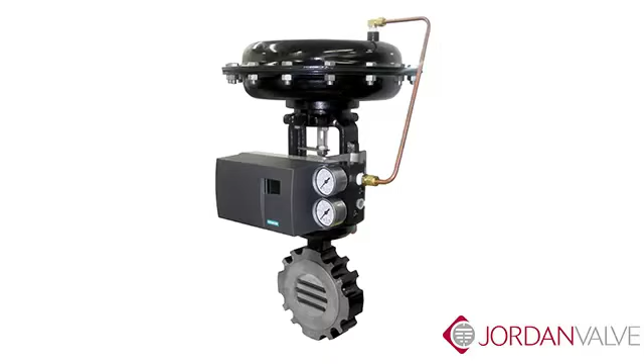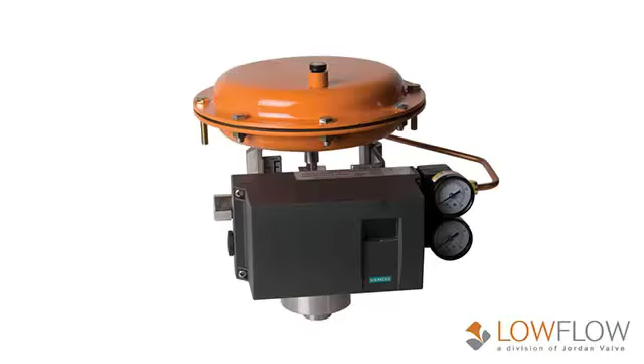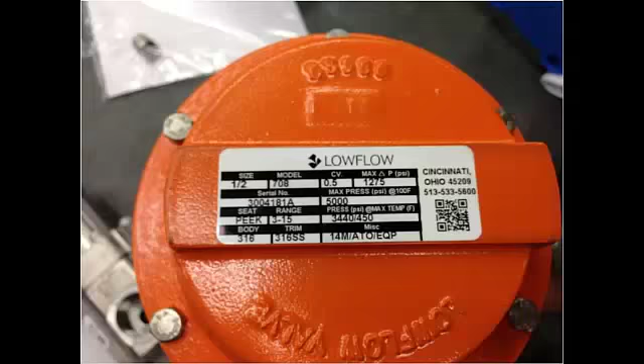Many Jordan, Steraflow, and Low-Flow products are supplied with the Mark 16 IQ side-mounted positioner. This troubleshooting guide is provided to help you quickly diagnose and fix problems encountered in the field. In order to determine what is wrong with your valve, you must first gather information about the product. Find and record the serial number and application parameters.

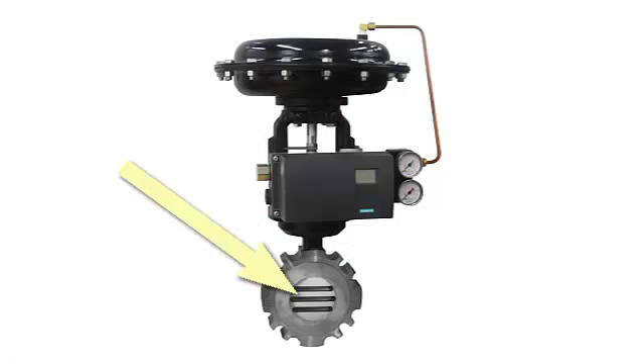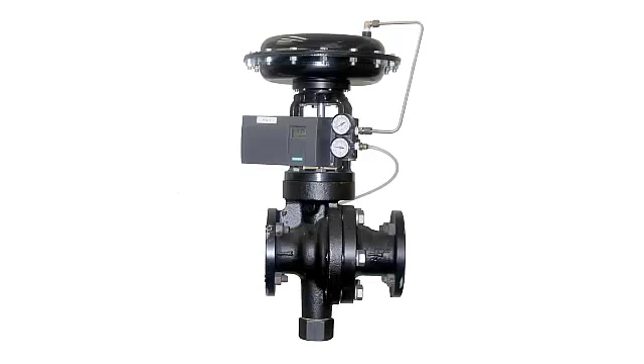There might be no problem at all, just something that the customer is unfamiliar with. For example, on all Jordan Valve sliding gate control valves, we zero the overlap of the seat out when we calibrate the positioner. Because of this, the signal reading will not match the position reading. Sometimes the customer interprets this as the positioner being set up improperly, but in this case, everything is set up correctly. Note that this won't be a concern on Globe-style Jordan Low-Flow and Steraflow valves, as they do not have this overlap.

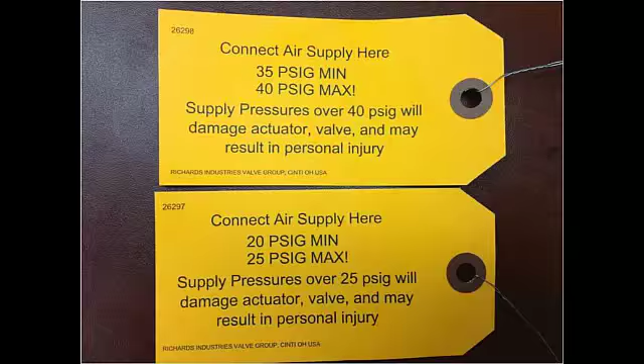Another common scenario is over-pressurization of an actuator. Jordan, Low-Flow, and Steraflow actuators are limited to 20 to 40 psi. Make sure your air supply does not exceed these minimum or maximum requirements. If the supply pressure is too low, the actuator may not have enough pressure to fully open or close the valve. If the actuator has been exposed to a pressure greater than recommended, it is likely that some internal components will be damaged and may need to be replaced. Note that it is strongly recommended to allow the factory to do this kind of repair.

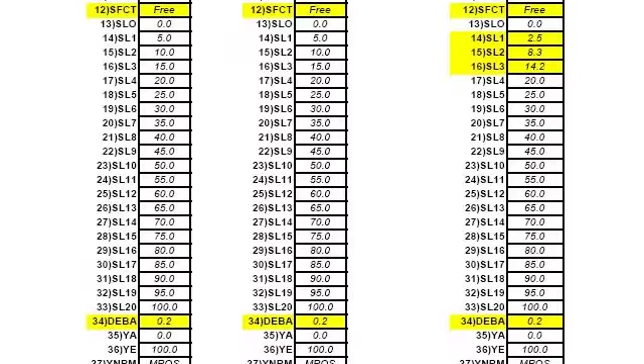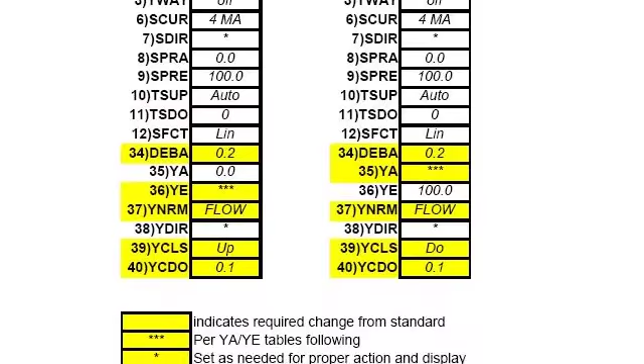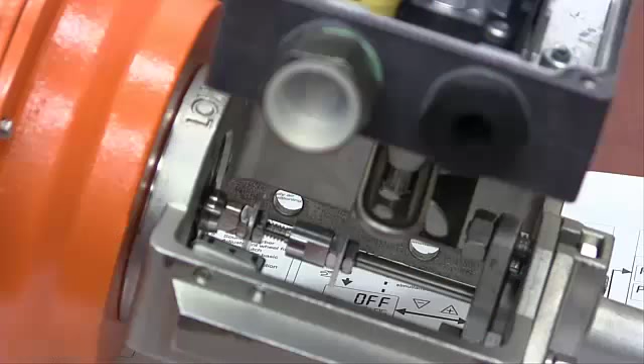All of the control valves that we install on the Mark 16 IQ positioner are factory calibrated before shipment. Included in the shipment is the positioner setup guide, which shows the factory settings for each valve. The guide is also available on our website. No matter what has been changed, it is possible to get the positioner back to where it needs to be. First, make sure that all the components in the valve are in working order. The mechanical connections should all be tight and not easily movable. All assembly parts should be firmly attached to the valve stem.

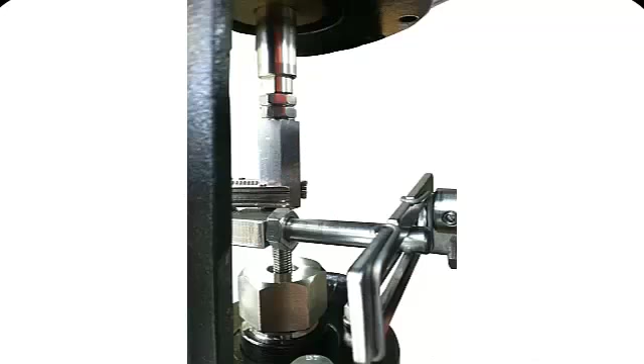Next, check that the linkage is connected and tight. The spring-loaded nylon bushing on Jordan and Low-Flow positioner arm pins should be engaged with the mating arm. The bushing is spring-loaded and should be firmly holding the cone in the bar. The Steraflow valve control linkage is a little different. There is no nylon bushing pin on the arm. The pin is held in place with a spring steel mechanism attached to the bar.

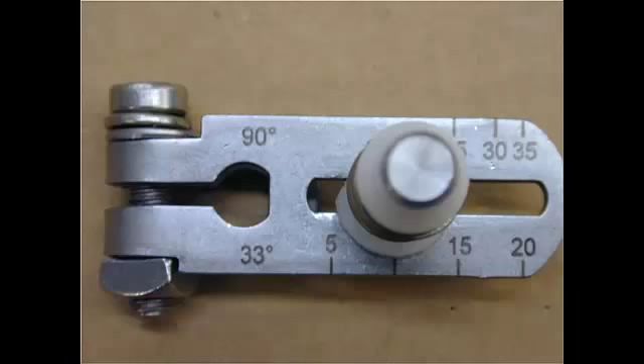Regardless of the valve and linkage, the pin must be properly set on the positioner arm. Make sure that it cannot be slid back and forth. On Jordan and Low-Flow valves, if it is loose, you can tighten the back nut with a 10 mm open-end wrench. If using a 4 to 20 milliamp signal, use the two-wire connection method, also known as loop-powered. Make sure the positive lead is connected to terminal 3 and that the negative lead is connected to terminal 8.

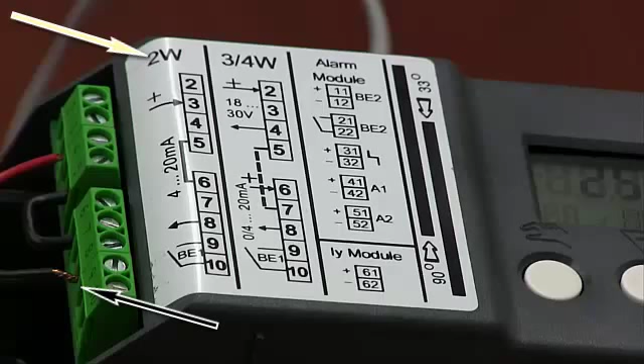If you are using a 0 to 20 milliamp signal, you must use the 4-wire method. First, ensure that the jumper wire that is connected between terminal 5 and 6 is removed. The positive signal lead should connect to terminal 6, while the negative lead is connected to terminal 8. The auxiliary DC voltage source should be connected with the positive lead to terminal 2, and the negative lead should be connected to terminal 4.

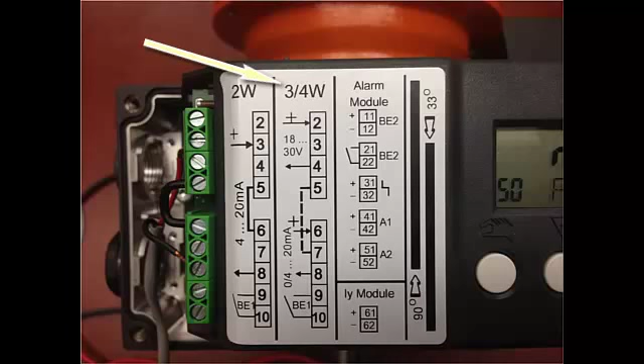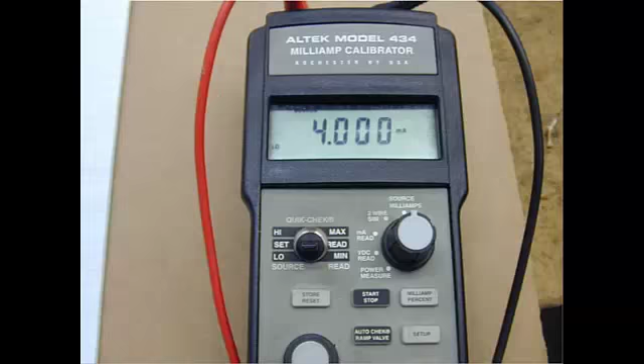If everything is okay mechanically, you now need to be able to change the input signal. This can be done through a control system or a 4 to 20 milliamp portable loop power supply or calibrator, such as the one shown here. You need to have at least a 4 milliamp signal to the positioner for it to power up. To get to the positioner menu, push and hold the hand key for 5 seconds. The display will change to the menu. The menu number is listed on the bottom left, the menu abbreviation on the top. The large font shows the current setting.

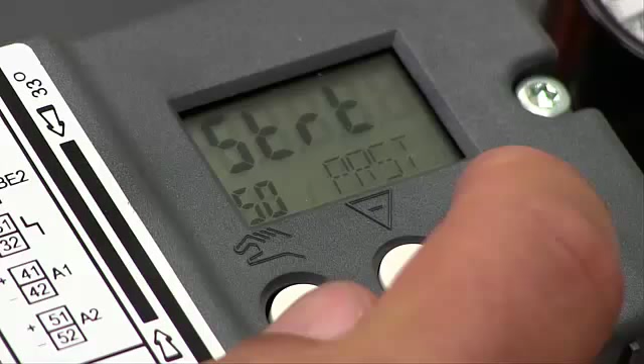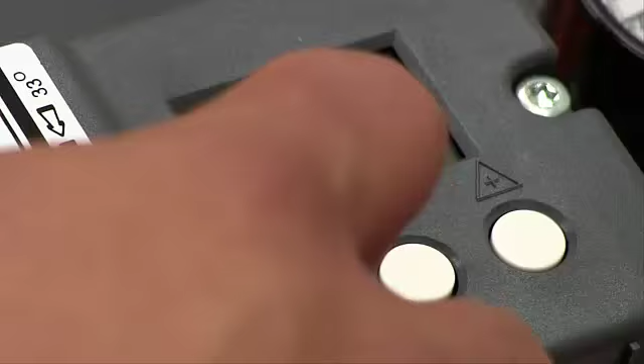To reset to the Siemens factory setting, use the hand button to scroll through the menu items. Stop when you reach 50. Push and hold the plus key for approximately 5 seconds. The display will change to start. Once the memory is reset, the display will switch to OK. The positioner is now reset back to the Siemens factory settings. Please keep in mind that these are not the same as the Jordan settings. Now that the positioner is reset, use the Positioner Programming Guide to change the settings to those of your specific valve.

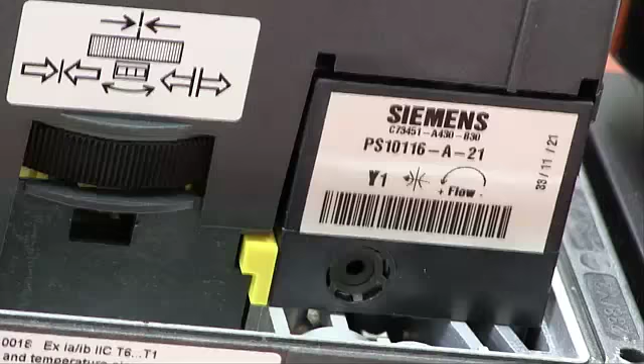You are now ready to test the positioner. First, ensure that the transmission ratio selector is in the proper position. If the stroke is in the 90-degree range, the bar must be shifted up. If the stroke is in the 33-degree range, the bar must be shifted down. You can use a pen or a pencil to push and click the bar into the proper position. Next, go to menu item 4. To initialize the positioner, hold the plus key for 5 seconds. The positioner will go through 5 different runs. This can take anywhere from 2 to 5 minutes.

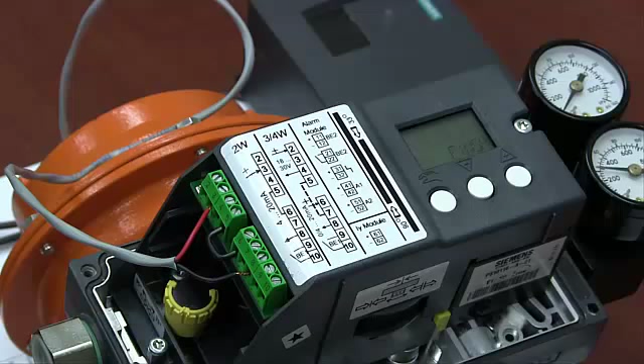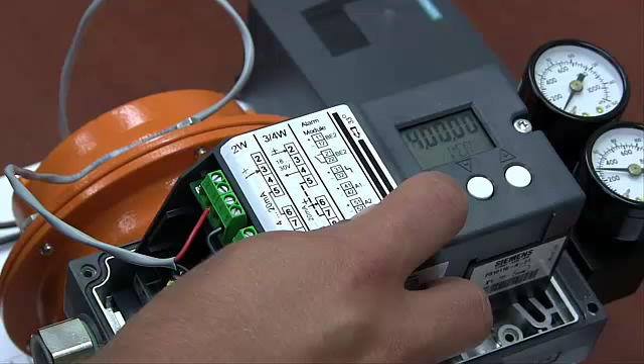During this time, the positioner will test to see the extent of the stem travel needed to fully open and close the valve by delivering small amounts of air to the valve actuator. The positioner remembers these fully opened and fully closed points. When the positioner is finished initializing, the display will read Finish. To complete calibration, press the hand key to return to menu mode. Now press and hold the hand key for 5 seconds to place the positioner in manual mode. Press the hand key once more and the display will show AUT for automatic mode or in service. You can double check that the valve is operating properly by changing the signal to the valve, but everything should now be functioning correctly.